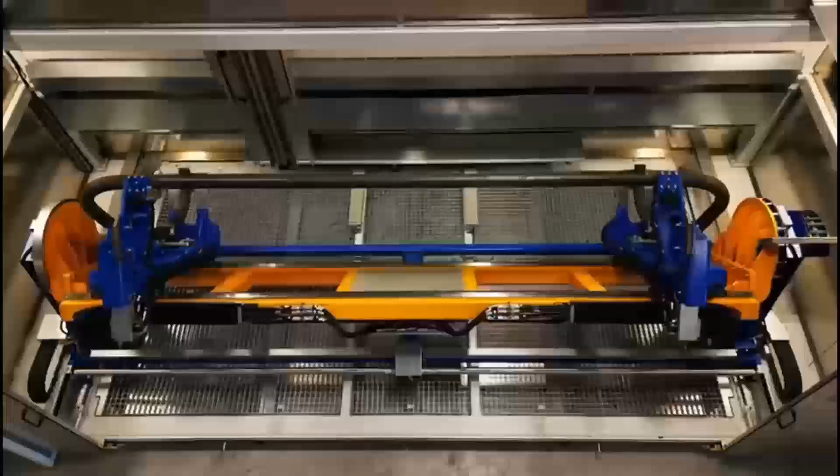But finally it works, and our product portfolio is growing day by day. Our product portfolio includes drilling, our special drilling machines. Here you see a drilling machine, a special one for 3D shaped frames, where we drill on pipes - piping drilling is really quite difficult. Then robot cells for loading and unloading existing machines.

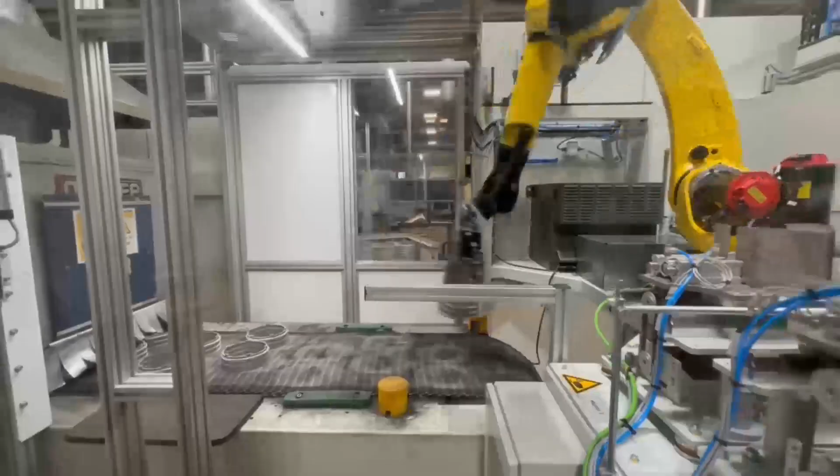Exactly, so unloading, loading in mesh boxes. It's not as easy as it looks like, so it's a tough job for us.

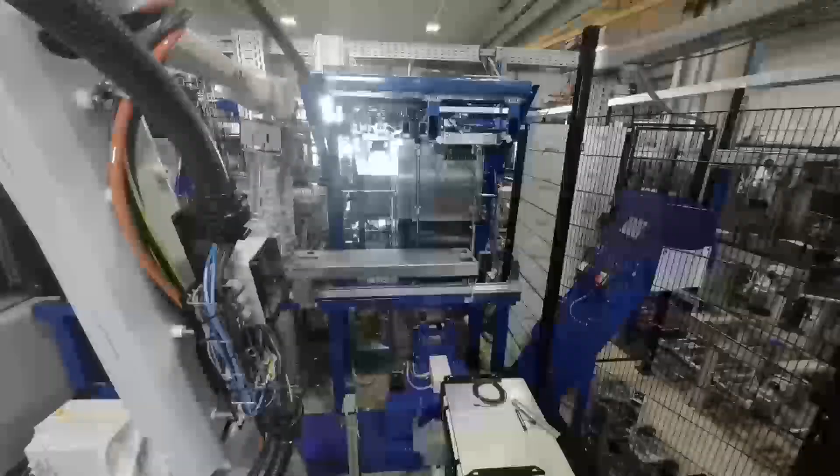We are also doing big lines, so this is one for ZF, for the gearboxes. It's a grinding line with vision technique, with measurement. This is the job we want, but it also shows how difficult it is, because this machine was designed from a white paper.

Very important, so from a white paper, all parts you see here are created in the 3DEXPERIENCE. And of course, some smaller machines, like this screwing machine for a company, I think you know the color.

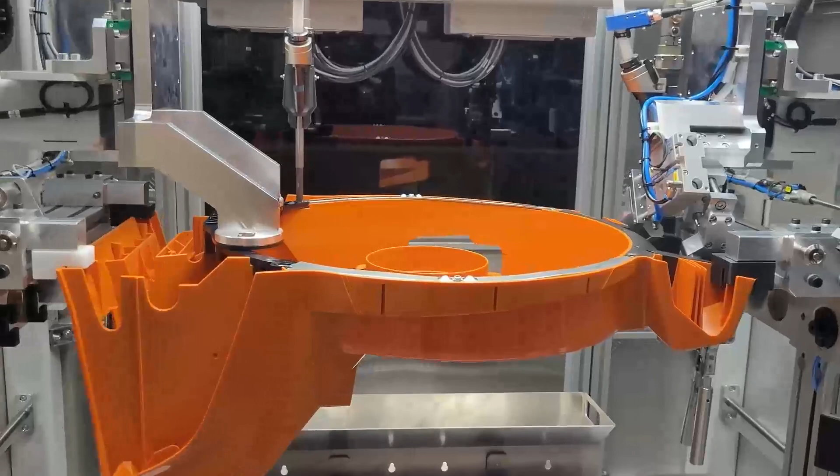What we are doing now, also small machines, always with vision technique. And you need a lot of experienced guys, smart guys, to set up this company.

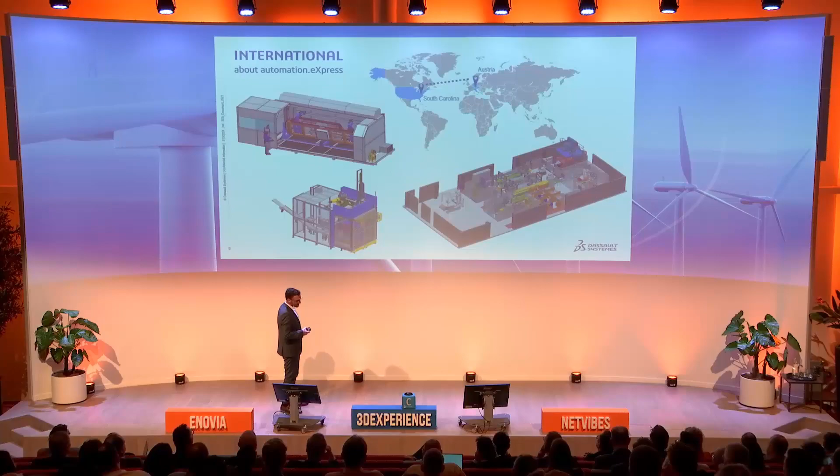So 3DEXPERIENCE, of course, the topic is international. Why international? I talked yesterday to Stefan about this. If you're building machines, you need about 60 employees, because of the massive amount of jobs you need for this. And we are now in the US market also, for these 3 years.

Why are we in the US market? Because a lot of customers in Europe are producing, and they are producing for the US market. So it's like step one, step two. Step two is, if you were producing or designing machines in Europe, the next step is to go to the US. So we now also have a location in South Carolina.

2 machines are running in the US, and step by step, of course, we are shipping machines from Europe to the US. So if you have experts, smart experts, and professional tools, you must not forget the infrastructure.

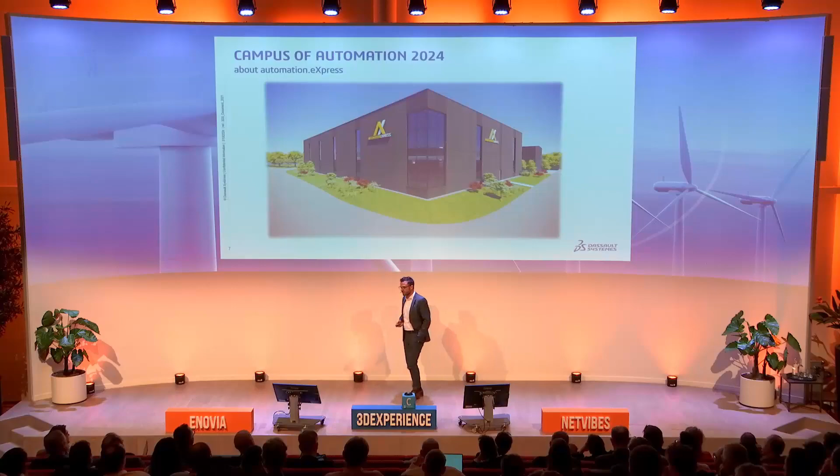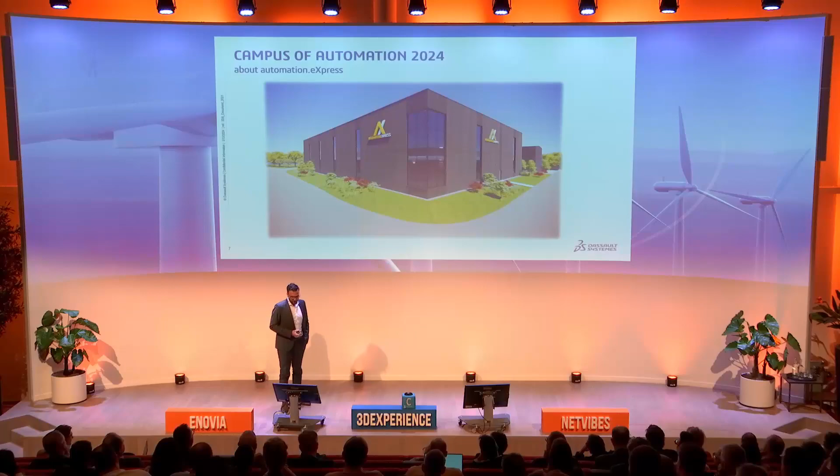The infrastructure is very important. You need a purpose for your employees, a goal for your employees, why they are doing it, why they are working for it. And so I fulfill my promise, and by July we will move into our own building, and be more or less a top machine builder in our area.

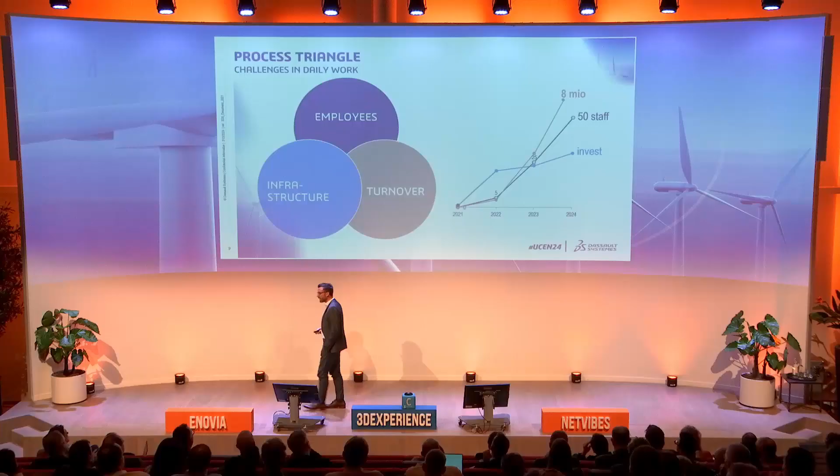But let's talk now a little bit more about the challenges in daily business, because I'm not the sales guy. I want to show you what I'm challenging, from zero to hero, from 1 person to 60 employees. I would say the biggest challenge is the process triangle, to keep it in balance.

In balance means employees, turnover, infrastructure. By infrastructure I mean infrastructure building, but also software processes. This is very important to keep in balance if you are growing from 0 to 60 people. This is the most challenging job, but of course it's my job to do it.

But by the end of the day, you need decisions every day while growing, because 3 years ago there were 0 employees, now we are 60. So for me it was a big decision how to go on, how is the strategy with CAD, how to document the machines with PLM, with PDM, and finally how to handle suppliers, customers, finance stuff. That was a really tough race for me to find the best way.

But by the end of the day, it was totally clear: if you are growing from 0 to 60 people or much more, you need one big world, a world with no interfaces, where everybody can jump in. So it's a big world, not only for designers.

We have to say this is the past. In the past, of course, only the designers had the 3D model. Now we are here, and everybody needs the 3D model, which means everybody needs access to the 3D model. That is why I'm saying everybody needs 3DEXPERIENCE, because the data should be saved in the 3D model, not in different systems.

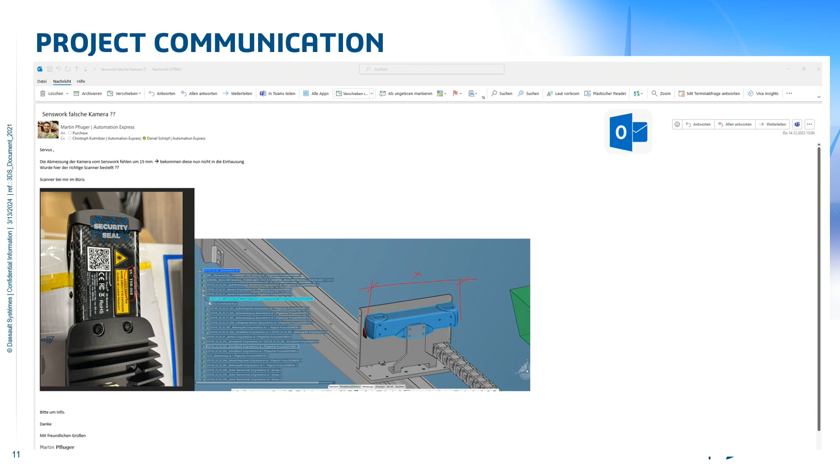Next is here you see how you communicate internally. I think you have the same situation, the same picture saying, oh, can you do that, can you do that? But it's only a conversation from A to B, and once the information is sent, you cannot change it. So for me, it's no good communication.

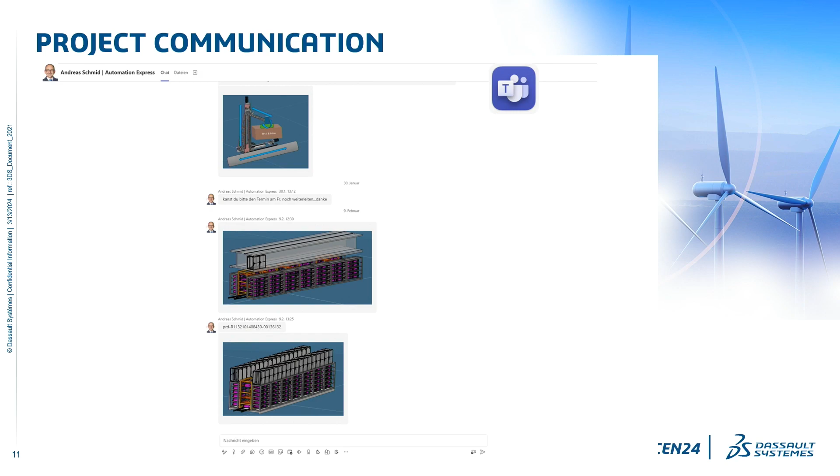Next, of course, is Teams. Every guy, every woman I hire in the company always asks me, hey, can we set up Teams? No, we don't set up Teams. Why don't we set up Teams? Because it's a different platform - it has no attachment to a project. So you have to set up the project again in Teams, and it's not attached to the 3D model. So it will have no future for me, no future for special machine designing. It's a nice tool for other companies, but for special machine designing, manufacturing, producing, it's not a good match, because the information in Teams is not related directly to the 3D model.

So the worst quick and dirty communication is WhatsApp. I have to say it's the worst, but it's easy - everybody has WhatsApp. So technician A sends technician B, I have the problem like this, I want to have that. So the worst is WhatsApp, I have to say it. But we have a project chat - I'll show you later how I changed it from WhatsApp to another chat, because we need this fast communication, but WhatsApp is not the best communication for projects internally.

Then my favorite topic, Microsoft Office Explorer. You know, it's tough for me because my smartest guys always say, if I save a PDF in one file, it is there always, you know, it is always there. I don't need a cloud, I don't need a system, I want my file store and there I put everything in. For me, honestly, it's not the future. The future is that these files have to be saved on the 3D model. It doesn't make sense - we are not in the past, we are not in the past 20 years ago where we didn't have the possibility. Now we have the possibility, so we have to use it.

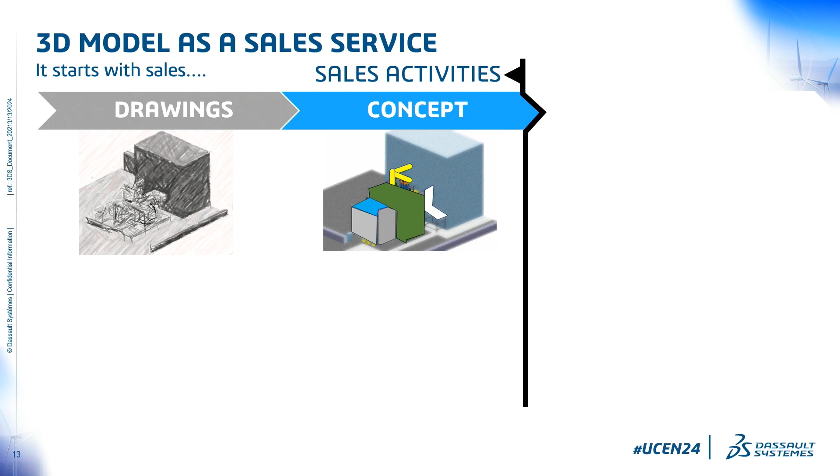I think this is one important game changer why we are so successful. All our competitors, from our side, are doing it the same way. They're making outlines on white papers, making drawings, then a sales engineer puts these drawings into some PowerPoint slides, and they bring the customer this PowerPoint presentation and say, hey look, this is our concept for this job. Only after getting the contract, the purchase order, do they start 3D modeling.

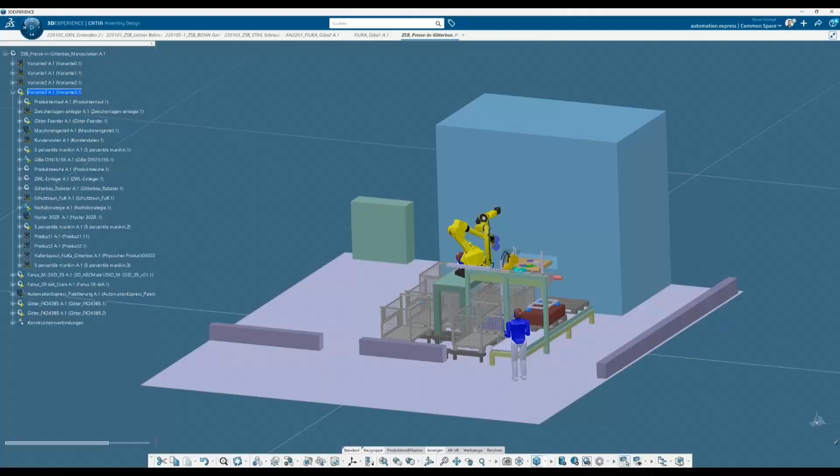In my case, it will not work that way. You have to start with 3D modeling from the first drawing, the first idea, the first outline. You have to do the 3D model, because with the 3D model you have much more opportunities. You win trust from the customer because he sees the machine and thinks, ah, it looks like that, wow, what I can do with this.

This is a really big effort from my side, a really big game changer, why we win every job. Because it makes it so easy for me. All our competitors only have 2D layouts, and I come with a 3D model that we can turn and have a look on, have a discussion on. So it's very easy for me since our competitors are not on the same level.

You have to know that as we're starting 3D modeling, this is already part of sales activities. And after that, it's easier for us. If you're modeling the 3D model, it's easier for me to jump with the project into the company.

So how often did you get from your boss a white paper saying, hey, I'm selling this machine, now you have to do it? It's very difficult for the engineer. But if the sales guy has a 3D model, and it's purchased, you can give it to him like a concept and say, okay, these are the red lines you have to follow, this is the happy path, go through it. This is why I'm thinking the future starts with the 3D model.

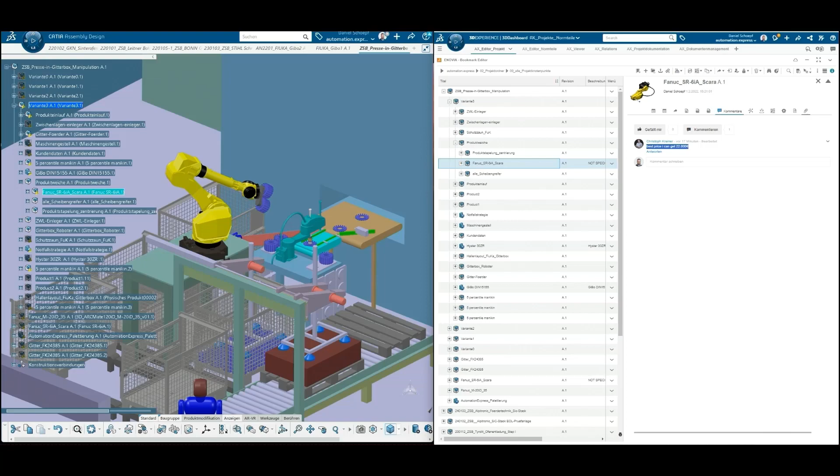We have the 3D model, not in detail, only solids, only the important facts. On the right side, the sales engineer can look at the data sheet, because the data sheet is located on the parts. So he can look at the parameters and see the simulation of the robot.

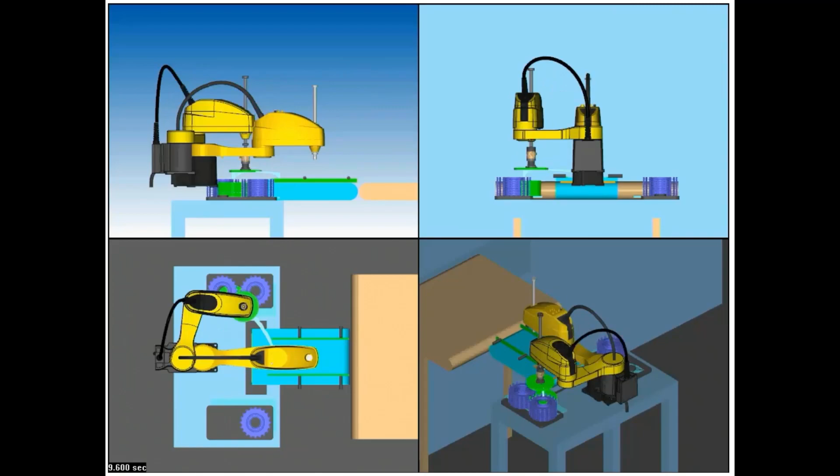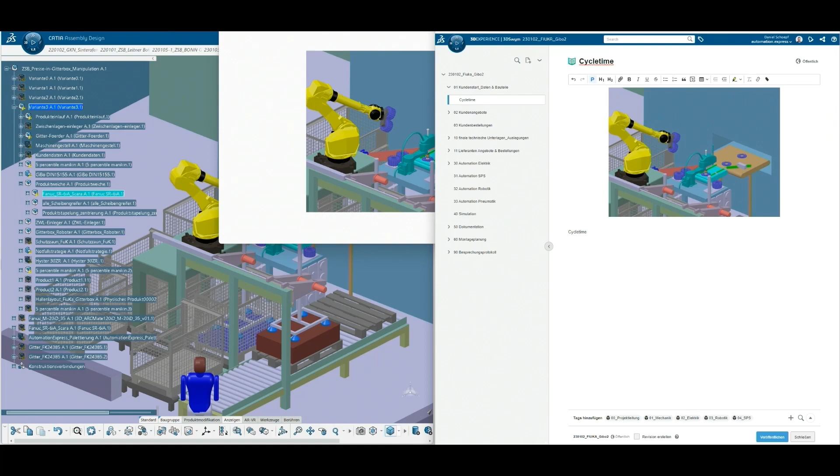Now comes an important fact: he should document everything also in the platform, not in a different platform or a separate sales platform. So he documents it - I'll show you afterwards how we do it - click to 3DSwym, put the picture in and write inside, okay, a cycle time of 2.2 seconds is possible or not. So all information from sales is collected in the system, and that data you can use if you get the purchase order.

Okay, let's go to practice for everybody, because before we were in sales and now it's for everybody. So how do we organize the 3DEXPERIENCE platform? We do it with dashboards, of course.

But with dashboards there's one important fact: each dashboard has one machine, and all information is located behind it. That means we have tabs, and each tab is fixed to this project. It's very important—we are not data analysts who want to share information up and down, left to right.

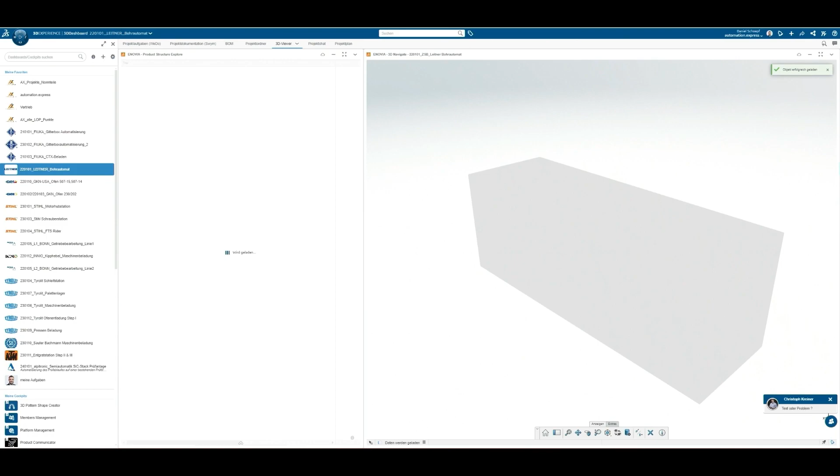We want to click there. I want to see the communication of the project, I see it. I want to click to see the list of open points, I see the list of open points. I want to see the bill of material, I will see the bill of material. I want to see the project file, so where everything is inside, I see it. I open a viewer, I will have a viewer. I don't need an engineer, a designer—I can do it on my own.

Warehouse management, I got some parts. What is this part? Where is it to assemble? He can open the 3DEXPERIENCE platform and have a look. So this is access for everybody.

This is very important—no excuses for everybody. I don't like excuses, 'I cannot do that,' 'I said it has to be like that.' These are only excuses.

Here you see the chat. We organized a chat for each project, so this fast communication can be very easily set up. And finally the project plan, of course everybody has to be online, everybody has to be where it is, and everybody can have a look. So this is how we organize the company, so that everybody is on the same page on each project.

Okay, now we come to an interesting topic: digital twin, virtual twin. However you call it, it's a twin. It's very easy for us as a company because we create it day by day—day by day we create our own twin because we are designing machines, manufacturing machines.

And now, an important fact: it's important for me to convince my employees to send these documents, what they are creating day by day, to the 3D model. They have to attach this. It's easier for an engineer because he's working with CATIA, but have you ever thought about how difficult it is for me to convince an electric designer to put his electric paper into a 3D model?

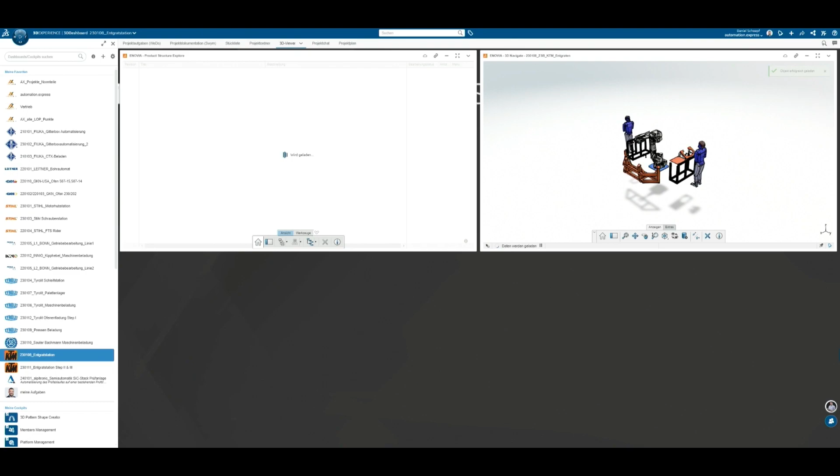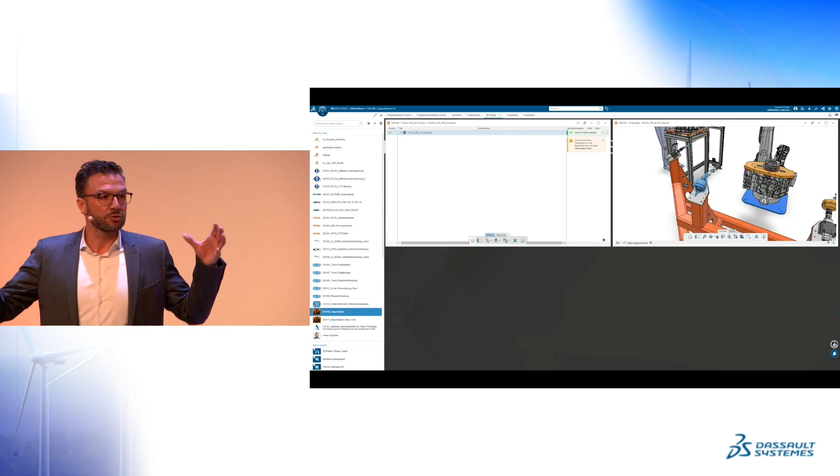So it's really difficult, but at the end of the day it's very clear: the 3D model gets much more quality if the parameters, drawings, and everything is attached to the 3D model. Why is it so important?

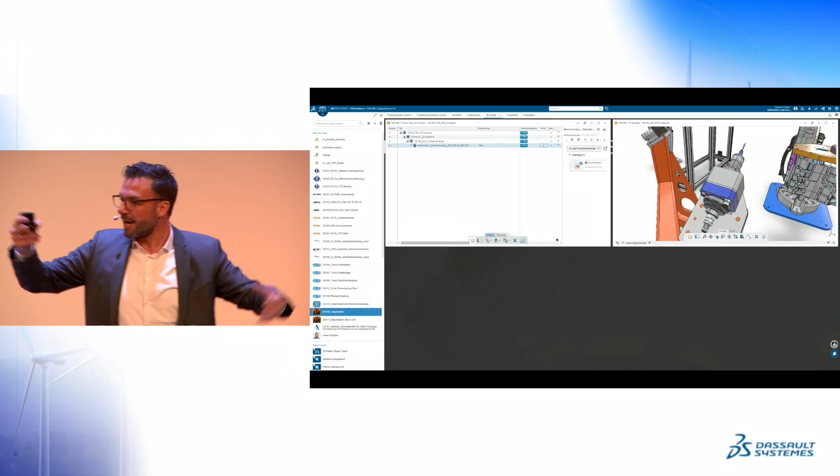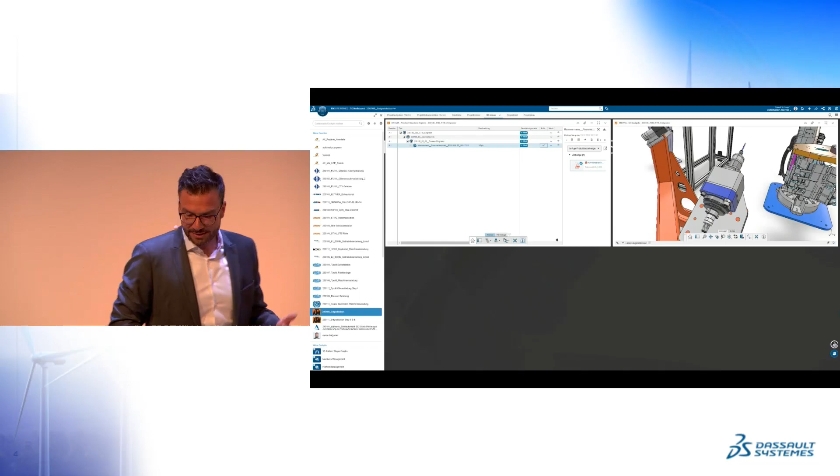If you assemble machines, you have the machine in front of you, you know the part, and you are checking into the twin and you want to see the same part. You don't want to go to a structure in Microsoft Office or whatever. You want the digital twin, you jump in, and there has to be the information—parameters, contacts, manuals, whatever, electric drawings, everything has to be at the part.

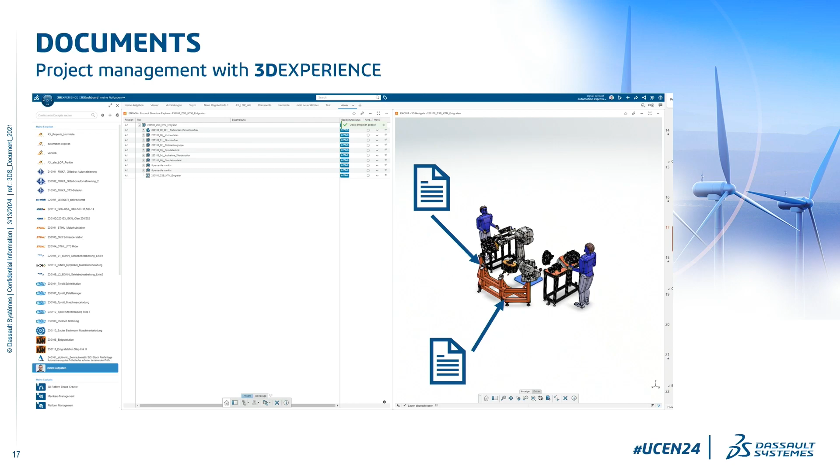And to navigate, it's very easy. Not to search, not to find, only to navigate through your 3D model to the data you want to have.

And finally, the communication: 3DSwym. We are using 3DSwym as we're using it for dashboards—we have communities, each community is a project, a machine, and on this we are collecting all information. That means you jump in via dashboard, go to the project you want, then jump on the community, and all our task lists of open points are in this 3DSwym. All communication is inside, all documentation inside.

But we're also using 3DSwym for communication for HR. We are using 3DSwym also for other processes like assembly instructions, assembly papers or electric papers. So everybody has access to a big world and everybody can do it very easily.

So what I'm very happy about is also the app. The app is very fast—you can jump in, everybody has it. So the quick communication via WhatsApp is not necessary, because you can jump into the project, make a picture, send it to my friends that everything is okay. Wait—okay, good. So very easy communication with the 3DSwym app.

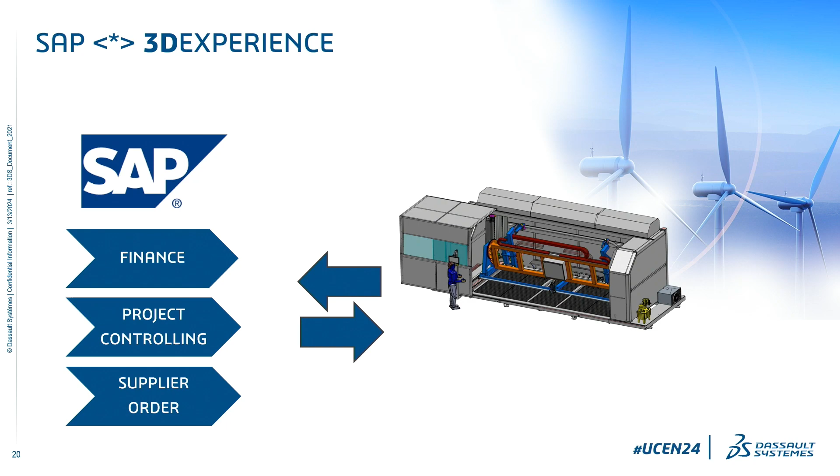So if you're using the best tool, the best team, the best infrastructure, of course, I'm not the sales guy, but then you need an international finance tool. So we are jumping in with SAP. Of course there are some disadvantages, some advantages, it is like it is.

But you need such a tool for finance, for project controlling, for purchasing to suppliers, purchasing to customers, invoices. By the end of the day, you need such a tool. And now comes the truth.

You have to connect it automatically. When you're doing automatic processes, by the end of the day, you have to do automatic data sharing from left to right, from right to left. Our company has existed for 3 years, and we started 1 year ago to connect both systems bidirectionally. Why is this so important?

If the designer creates the 3D model, there's a lot of information in it - color, quantity, name, supplier item, supplier, parameters, whatever. And when you have no connection, the purchasing department or whoever has to do it again. Much more critical, I see that it's not updating - when you update on the right side, there's nothing on the left side. So for me it was totally clear that we have to jump in very fast to connect both systems.

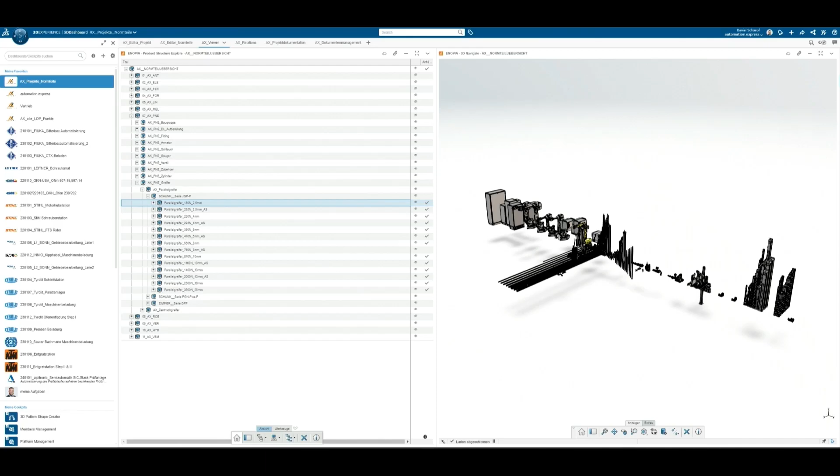And so now we are able to connect both systems. We have our catalog with our parts, of course. Our parts have item numbers. Item numbers on the parts bring much more quality because it's a number, not a name.

And with these parts, everybody can select this part and have a look. Here we see a gripper from the company Schunk. Now he jumps in to see the parameters from this gripper. It opens very fast with a 3D Play. He can have a look - he doesn't have to download it again from the internet.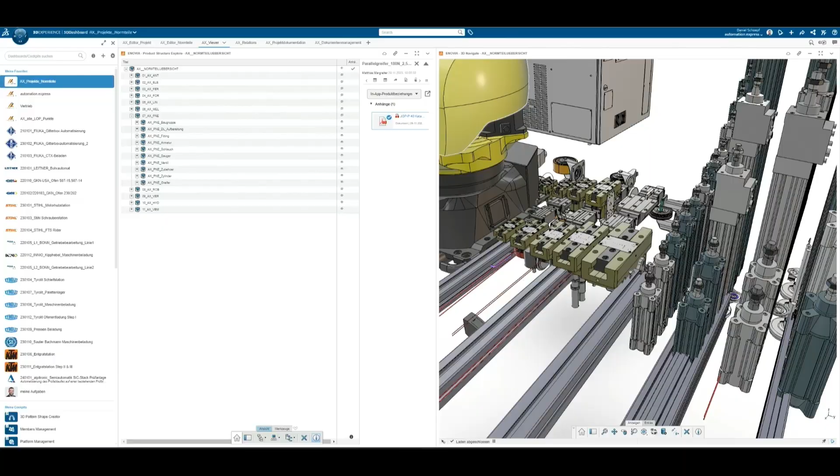It's always the same - a new engineer comes in, opens Windows Explorer and downloads everything. It's not necessary. Everything is stored in the 3DEXPERIENCE platform. But here you see the information.

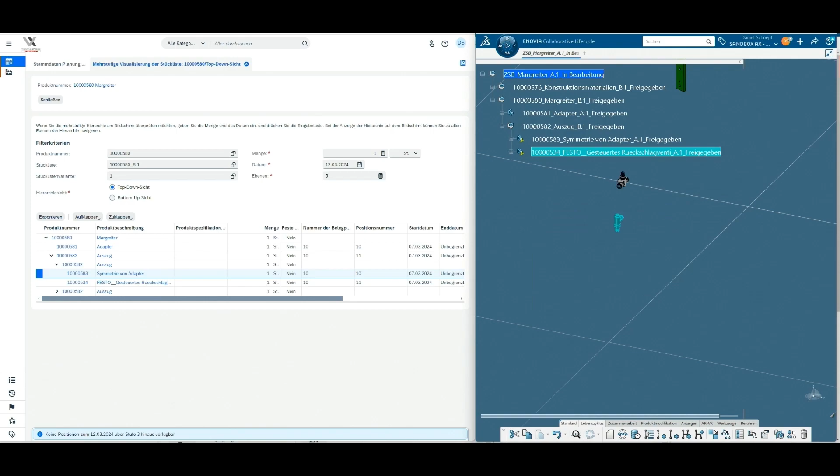So on the right side you see the designer. There's some change management he can do. So we have some release management. And after releasing the complete tree, not just the part, the complete tree, we ship it from right to left.

That makes sense. But by the end of the day, the purchasing department also wants to have the same structure, the same design as the designer created, because the designer is thinking about how the structure has to look to organize. So we also need the same structure, the same bill of material structure on the left side. This was also one big fact I told to SAP.

I want to have copy-paste. I want to have the similar situation as we navigate on the right side with a tree - I want to have that also on the left side. I don't want to have lists - lists are too easy. I want to have products, I want to have parts. I need this structure also in SAP.

And this is also, I think, a big game changer for the future, because the designer is more or less creating the data, and the purchasing department only has to press the button.